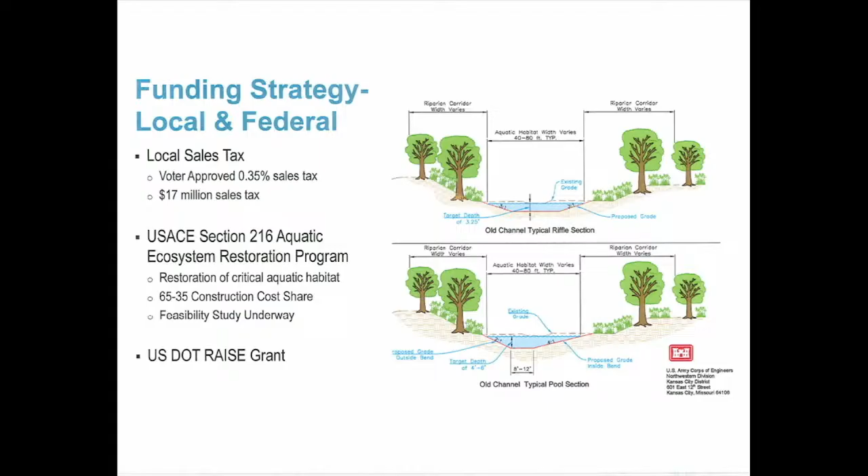And then there's the U.S. Department of Transportation RAISE grant, and Eric Dove is going to cover that part of the project. We received a little over $22 million from the RAISE grant. I joke with people that our 'wow' would have been a 'woo' - it wasn't going to be much of a beautiful area because our funding was going to be so limited. That $22 million really gives us an opportunity to build much, much more of a project.

Now I'm going to talk a little bit about the cost of the project, because some may be interested in that. Our project cost for construction was a little over $28 million. But one thing we had to think about is this project gets built over several years, so we added about $5.5 million of contingency to cover inflation.

In today's world, if somebody asks, is that enough? I don't know, but it was the best we knew at that time, about a year ago when we put this together. We'll know when we go to a bid letting. So roughly this project with the RAISE grant is right at $39 million. The federal share is $22 million, leaving about $17 million for the city.

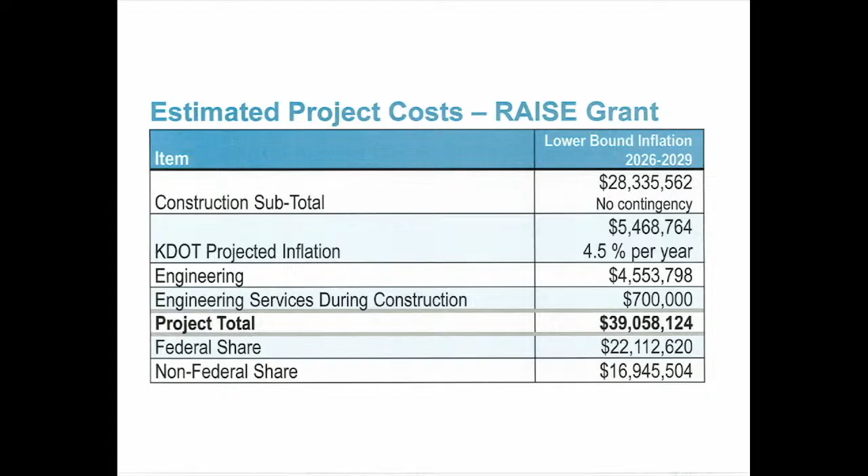To be able to take this project to the city commission on the RAISE grant, when you sign the agreement with them, you're signing up to build everything that was in the RAISE grant, whether it costs more than the money you have. So when you sign up, you're signing up to build the project for whatever the cost is. I was trying to be honest with our leaders and show the RAISE grant and the U.S. Army Corps of Engineers project, which in the future we'll be talking a little bit more about - I think a public meeting on it maybe in August.

But there are some additional costs that go into each of the projects, including the RAISE grant, feasibility study, 4th Street Plaza, and property acquisition and so on. It's roughly about a $46 million project total. The U.S. Army Corps of Engineers project as budgeted today is a little over $21 million.

We have some additional costs with them for a feasibility study, and we're purchasing some water rights from Kanopolis Lake to be able to have water when there's drought conditions and low flow in the river. That's through the assurance district, and recreational rights are approved there. So roughly 22 to 23 million there. So our total project spending on the RAISE grant and the U.S. Army Corps of Engineers is roughly 69 million.

And I was a little short on money when we put that all together and included the inflation, so we had to look for some other funding. We're looking at dollars through the general fund, the utility fund, some ARPA funds from the COVID times, and street and property tax. Ultimately the city's share is $29 million budgeted now, and about $40 million from Friends of the River and the federal government between the Corps and the transportation grant. So I'd like to say we've leveraged our money, and we're about 42 cents on the dollar for the project.

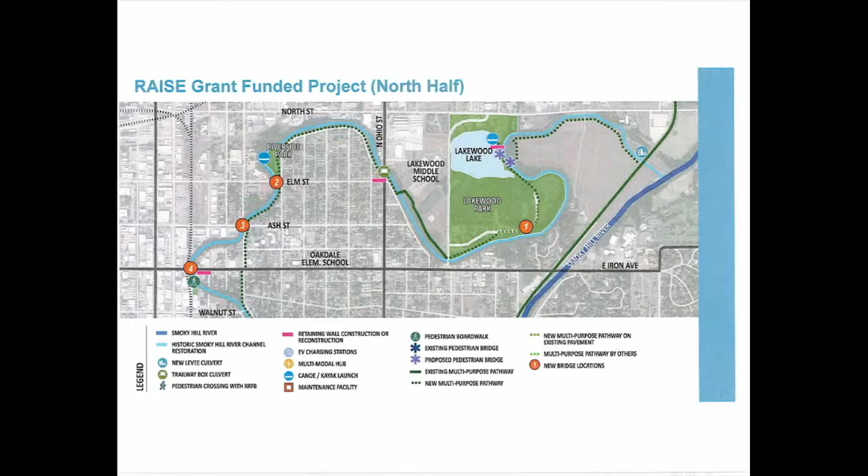We'll be able to close that for special events. Troy will have some wonderful renderings that will show what that looks like.

As we continue to move south, now we're into Oakdale Park. There will be a building for the city to store a boat so they'll have access both for maintenance and emergency events, and there'll be a new kayak launch there too. The building was located in Oakdale because there'll be a flex space, so it can be used during major events like the River Festival. It'll be a dual purpose building.

We'll have additional trails that come down through the park and tie into the YMCA trail that was built. That trail is 10 feet wide, and it'll be very similar to the trails we'll be building. At the YMCA driveway, there will also be a new bridge and a new canoe and kayak launch facility there. Coming on down through to South Ohio.

South Ohio, there's actually a culvert there, but you can't see it. It's completely filled with sediment—about 7 feet that has to be removed to get the water flowing downhill again. So we'll put in a twin box culvert: one box for the water, one box for pedestrians, so you'll be able to go on the trail and go under South Ohio, just like what you can do at North Ohio.

We have a bus stop right there, and right now you have to race across 5 lanes of traffic to get there. So we'll have pedestrian improvements to take you under.

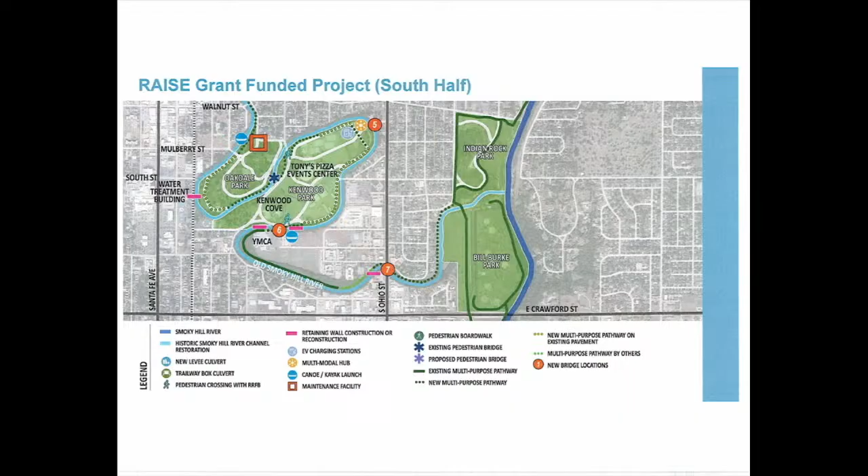There's an existing trail that we'll go ahead and pave, and that'll take you into Bill Burke Park. So when we're all said and done, you'll be able to go from the levee trail that's there all the way through these new interconnected trails, all the way back into Bill Burke Park. I failed to mention Midway—Midway also gets a new bridge. So a lot of elements, and I buzzed through that as a big picture so that Troy has plenty of time to start talking through the aesthetics and what each of these would look like.

I always say Troy gets the fun part, he gets pictures.

Thank you, Eric. I'm going to expand on some of these items Eric was talking about. So basically the process we followed was—Martha mentioned the previous effort where we had 25 members of our aesthetics committee. What we did since then is continue some of their ideas and thought process that they helped us with during our master planning process. We got together a smaller group that focused on some of these aesthetic design elements.

What we did is produce an aesthetic design handbook. So whether things are in this phase or a future phase, you can always refer back to this handbook and say, here's the materials we need to use within this certain area if we're adding an amenity within the corridor. Whether it's in this phase or not, they can always refer back to that and see what was envisioned, at least during this effort.

Some of the items we covered for enhancements on design features were the bridges—looking at the various materials used, different lighting, and how the pedestrian handrails could look. We also looked at the paving and hardscape materials: are we using bricks, colored concrete, textured concrete, things like that.

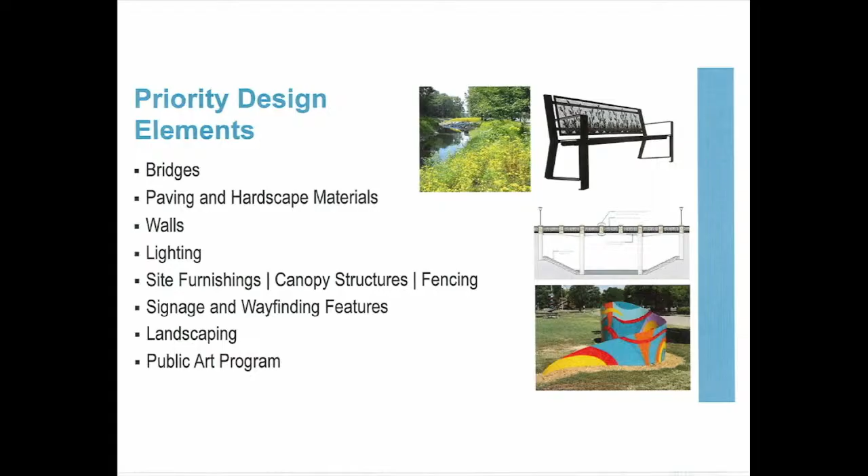We thought it was best to break apart the corridor into districts. Within each of these districts, everything would tie together—like we'd have the same bench there, we'd have the same materials used for the pavement. And we broke it into 3 distinct districts.

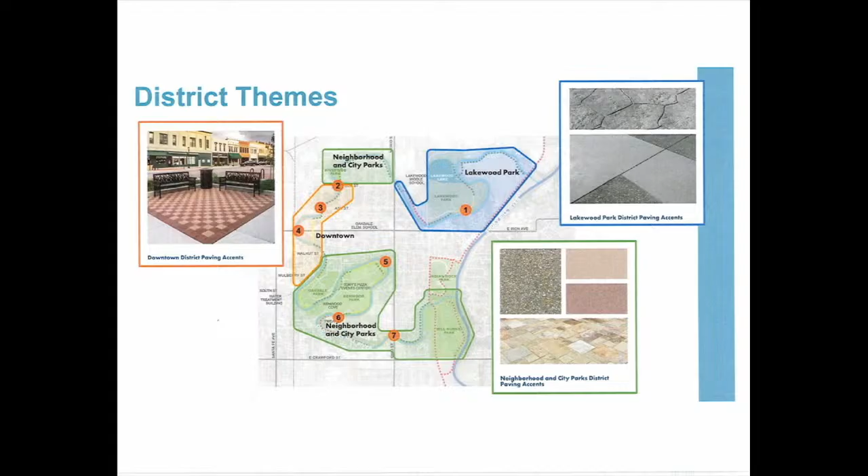So to do that, we looked around town at some of the local precedents and features that already exist. We tried to take cues from those, whether it's the materials, the shapes, the patterns. You can see a lot of the Art Deco patterns on the buildings down there and surrounding downtown.

We took a look at the downtown streetscape as well, and some of those elements utilized with the overhead pedestrian crossings that are mid-block. But then you can see some great features within some of the existing parks—Oakdale Park and Kenwood Park—with some of those old WPA-style stone walls and picnic tables. So we're trying to use some features seen there as well. Here's another set of elements we're looking to incorporate similar ideas from.

So the first thing we're going to talk about tonight is the bridges. This is a picture of the existing Midway Bridge, which is just outside behind me here. As mentioned earlier, there are 7 new bridges in these 7 locations.

Number 1 would be the Lakewood Park Bridge—that's the vehicular bridge, but as Eric mentioned, there are 2 pedestrian bridges there as well, just on the east side of the lake. If you can see those purple asterisks, it might be hard to see from where you're sitting, but there are 2 pedestrian bridges there and one vehicular bridge.

Then moving on to number 2, the Elm Street, the Ash Street at number 3, the Iron Avenue at 4, and then number 5 would be the Midway Bridge, again right outside the doors here, and then the YMCA Bridge, and the South Ohio twin box culverts. So I'm going to show you images of the vision for each one of these.

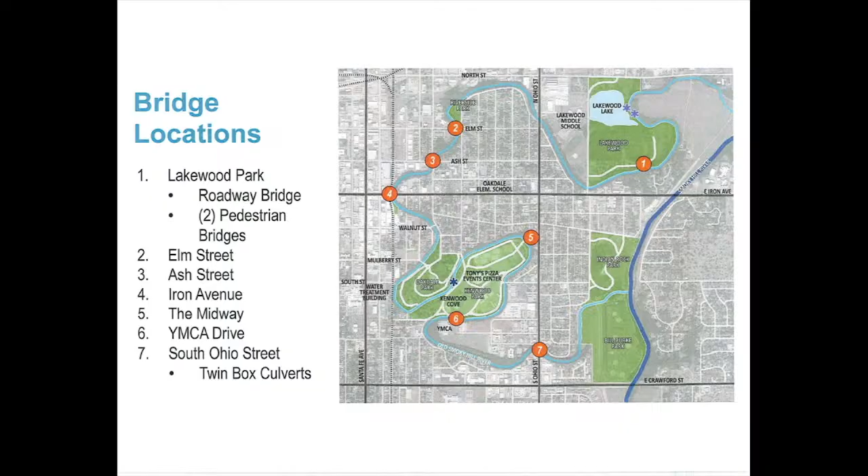Here's the Lakewood Park Bridge, and again, we want to incorporate naturalistic elements. What you see on top are 2 photos—the one on the right would be limestone materials, more natural stone, to be incorporated in the columns that you see on the bridge deck itself. Between those columns would be a pedestrian railing where we'd incorporate features like the one on the top left, which is big blue stem grass, one of the main native grasses in the area.

To tie all the bridges together, we're using the same lighting style, so you can see those images on top of the bridge. That will be utilized on all of the bridges within the project here. So that's the Lakewood Park Bridge.

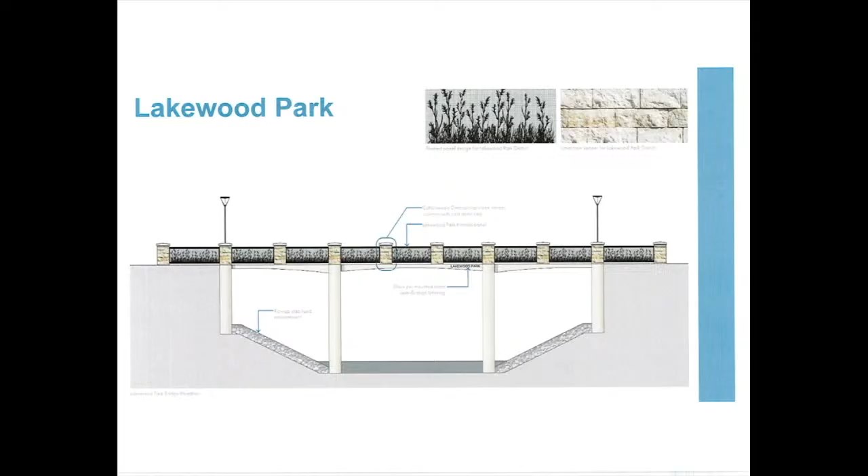Next is the pedestrian bridges, which are also both in Lakewood Park. These are a little different—they're going to be pre-manufactured off-site and then just dropped into place, with the abutments that we'll be building there. As Eric mentioned, one will cross the existing historic channel, and another will cross where the connection is made between that existing channel and Lakewood Lake. They're not too far apart from each other, generally on the east side of Lakewood Lake is where they'll both be located.

But as far as the appearance, they will all be kind of weathered steel, as you see here—that rustic type of color.

That'll have a concrete floor on it, not wood planks like you see in that bottom right photo, but more like the middle photo with a concrete decking on that.

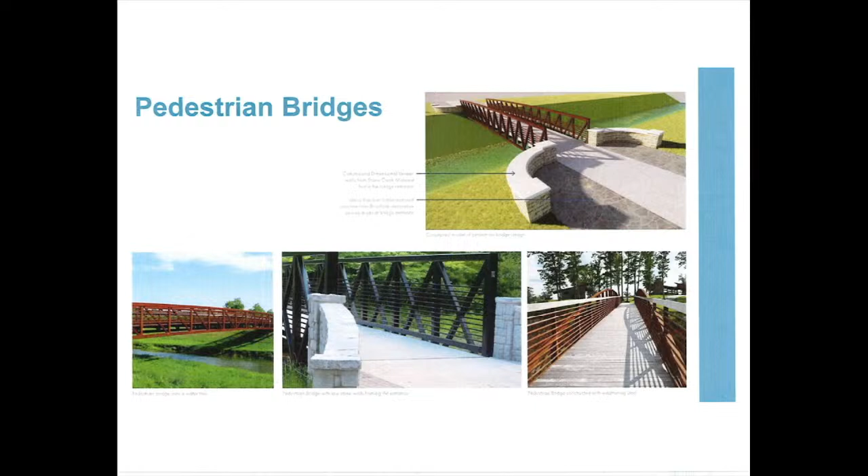The next bridge moves into the downtown district. Elm Street, Ash Street, and Iron Avenue all have features of Art Deco, so we're trying to tie that together with the downtown features. We're utilizing similar brick colors to what you see in the downtown streetscape along Santa Fe Avenue, the two tones of brick colors. Within the columns on the top side of the bridge, we're incorporating that chevron shape you see downtown on sidewalks as well, which helps tie that together.

On Elm Street, the pedestrian railing at the top of the bridge would incorporate that. This bridge would have the circular pattern you see there, an Art Deco pattern. Again, turning it from a culvert currently to opening up quite a bit underneath there to really allow the water to flow through.

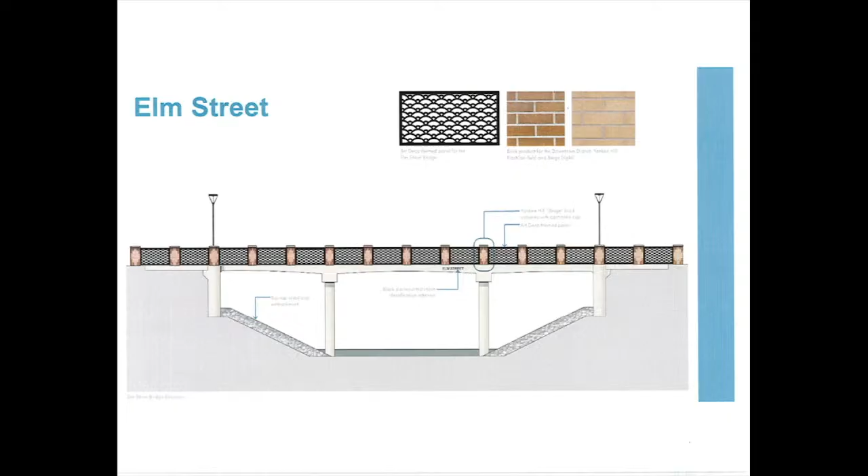Ash Street is pretty similar to the Elm Street one, except it has a different Art Deco pattern for the pedestrian fencing up top. Other than that, they're fairly close - the same lighting, the same brick columns on both those bridges.

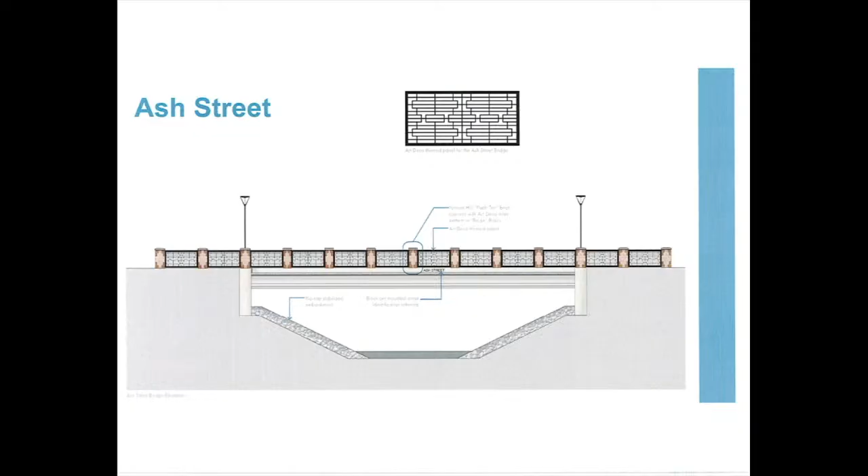The Iron Avenue bridge is what we see as the gem of all the bridges we're putting in. We feel like that's the one closest to the gathering space, the closest point to downtown Santa Fe Avenue, and we have a lot more opportunities to incorporate aesthetic enhancements there.

You notice underneath the bridge on the left side, that'll be a boardwalk connection, so we'll be able to get right down there at the water's edge. The boardwalk will be raised about 1.5 feet above the water surface, and that'll be going in as part of this phase.

On the other side of the bridge, on the right side, that's a future connection for the multi-use trail to go underneath there. Just due to funding, and it would require a lot of retaining walls to get down there at this phase, we had to bypass that particular location for the trail, but the plan is in future phases to make that connection.

On the sloping walls that go up to the top, we'd again use those same two brick colors in a random pattern to help tie that together. The columns themselves are going to be concrete on this one, similar to the existing bridge now where all the concrete columns are currently, but between those concrete columns, the shape will be similar to the downtown street monuments.

Where it has the street names on them along Santa Fe Avenue - similar shape to that, as well as the columns that hold those overhead pedestrian crossing panels. The same lighting would go here that you see elsewhere, and the pattern on the pedestrian railing would be similar to what you see downtown on Santa Fe Avenue on those pedestrian crossings. This one will have a lot more enhancements for lighting as well.

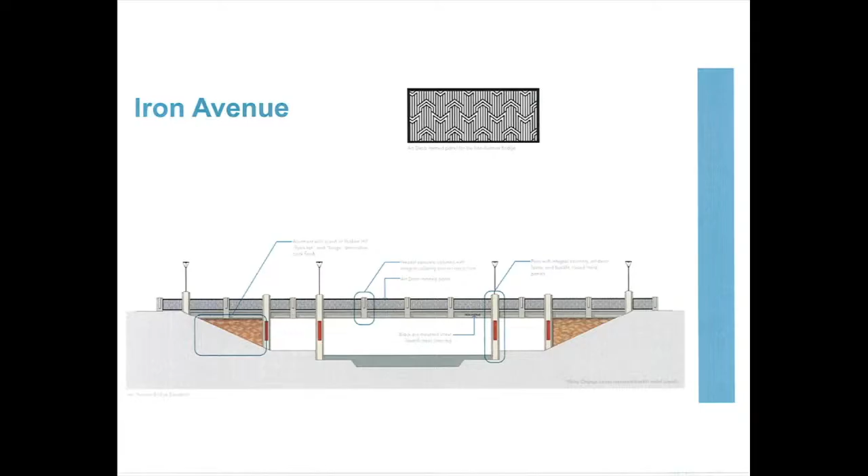Now we're moving into the Parks and Neighborhood District, and this is the Midway Bridge right out front here. Again, you can see on the bottom, this won't be part of this phase, but we're leaving space for a future trail connection to go underneath Midway during a future phase. Right now there's going to be a trail that'll cross at grade up on the top level, but there are plans for a future phase that would go underneath here.

As for materials used here, instead of brick or the limestone pattern we saw on the other bridges, these columns would have more of that WPA style stone work like we see in Oakdale and Kenwood Park. Similar stone look, and that would also be on the slope that goes from the river up to the top of the bridge too - similar elements as far as the stone work there.

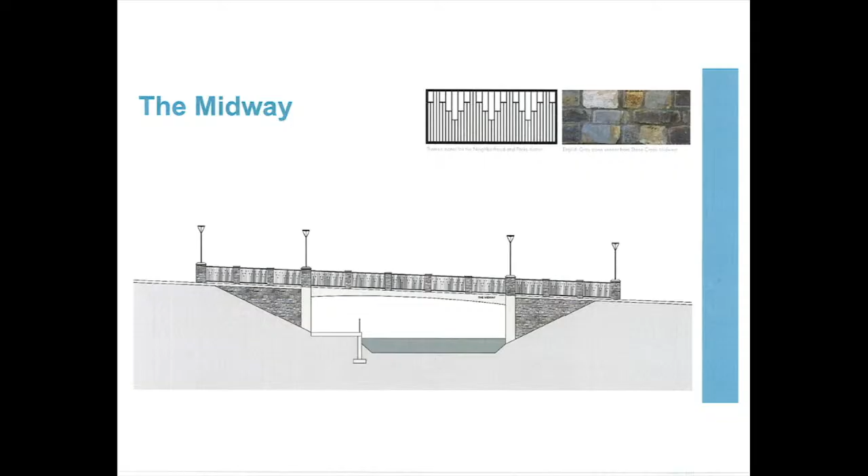The YMCA bridge is just one of the shorter bridges in the corridor, but it's a very important connection for the kids that go between the YMCA and Kenwood Cove. There will be a lighted walkway crosswalk for them to get over to Kenwood Cove, so it's a safer connection. But it would have similar columns to what we saw on the previous Midway Bridge.

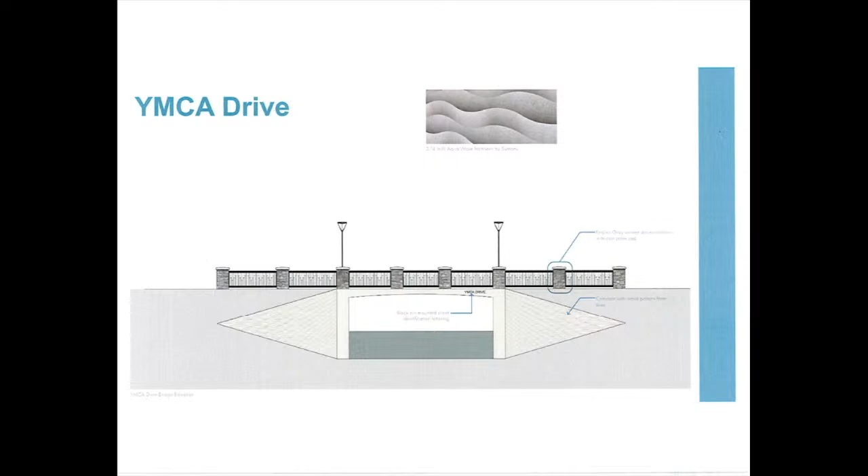On those triangular wing walls that come out, we anticipate using a pattern like you see on top there, kind of ripples that invoke movement of water. That's a foam liner on the concrete wing wall that'll have some texture to it, and we can use lighting on that to create different shadows and a nice aesthetic appearance.

The last one is technically a bridge because the opening's wide enough, but it's really two side-by-side box culverts, as Eric mentioned. This is what an image of that could look like - side-by-side, 12-foot wide openings, with the trail on the left and the water box on the right. You'll see a big retaining wall on the right as well, leading up to the Kawasaki dealership that's there currently, and then that would have a nice fence and railing on top so folks don't fall over the edge. But that's the idea there.

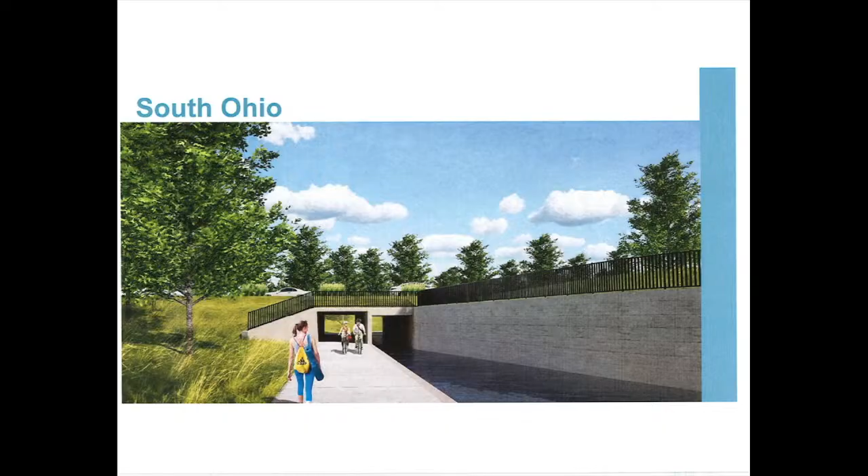Along the side of the trail, you can see some of the landscaping there. That's the idea - we don't want a manicured slope. It'll all be native materials that don't require weekly mowing or a lot of maintenance once it's established. So that's kind of the idea throughout here.

4th Street Plaza is right at 4th and Iron, one of the closest points to downtown and Santa Fe Avenue. You can see some of the existing photos on the right - that's where the car museum is, that old gas station on the corner. The white building in the top right is right at the corner, next to the old flower nook. It also has a railroad going right through the middle of it, which causes its own set of challenges. But we see this as being a nice gathering space for the community, right there at the Iron Avenue Bridge.

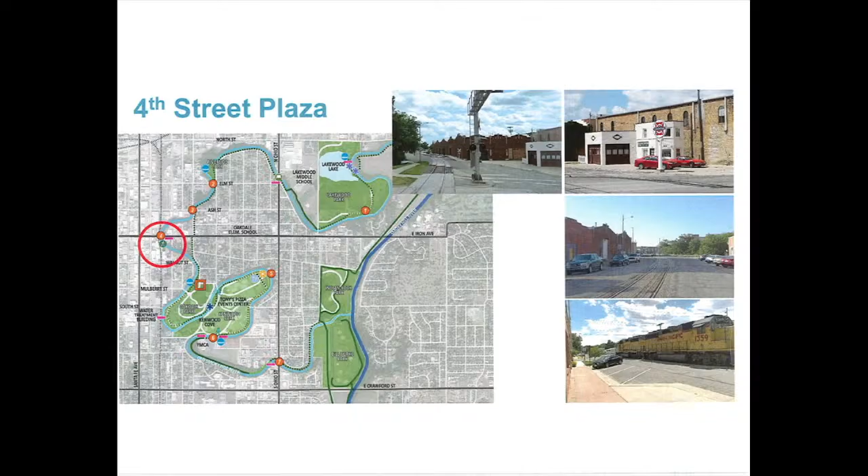Here's the vision for what Eric was calling the complete street - I call it a shared space street. We're envisioning a curbless environment, so there are no physical curbs to help direct cars. We're using other features to make that transition between what's used by motorists versus pedestrians or bicyclists - things like bollards, vegetation, light poles, benches, and large limestone blocks, to help prevent folks from driving off-line. Although it's as wide as a typical roadway, we're visually narrowing that by using bands of concrete on either side.

It might be hard to see from there, but as well as the middle, we basically turn a 24-foot roadway into two 9-foot lanes. That visual narrowing of the roadway causes the motorists to slow down as well.

The crosswalk you see in the bottom right there with the number 6 is aligned with the 4th Street entrance into the car museum. That's kind of the southern terminus of what we're talking about here, the car museum steps that go down from their entrance off of 4th Street.

What you see grayed out in the top there is that future project. That project, along with the steps I showed you a couple of slides ago that go down to the boardwalk, is all a separate project. What's anticipated to go in there is a playground, a pavilion space, a water feature type of project, as well as some other seating areas. All that will be a separate project, but it's adjacent to this plaza area.

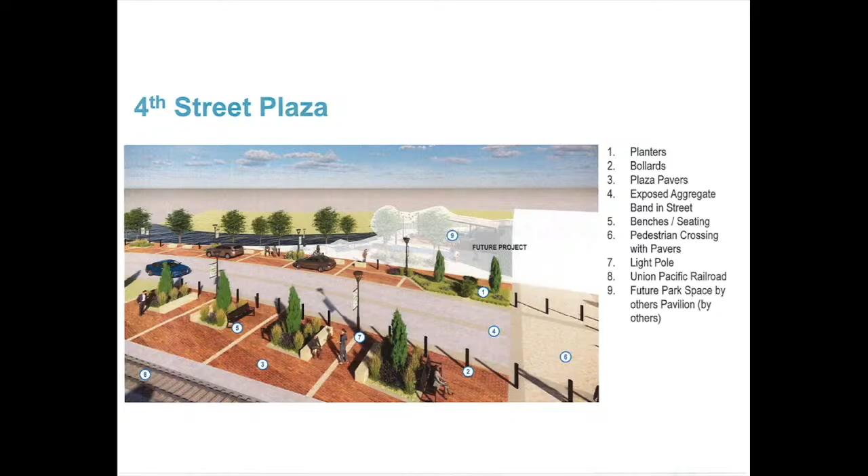This takes a look at it from the north. This is Iron Avenue looking to the south. You can see the old gas station there with the white building on the right, kind of blocked out. But in the middle of the roadway you see those 3 vertical bollards - those can be removed or put in place when there's an event to have that street closed off.

It's hard to see the boardwalk there. You can kind of see it up to the water. This is why I showed that first slide that showed that a little better. So that boardwalk is included and the street is included, but that transition from the street down to the boardwalk is not included here. We do have a set of stairs over at 3rd Street that'll access that boardwalk until this interim project goes into place.

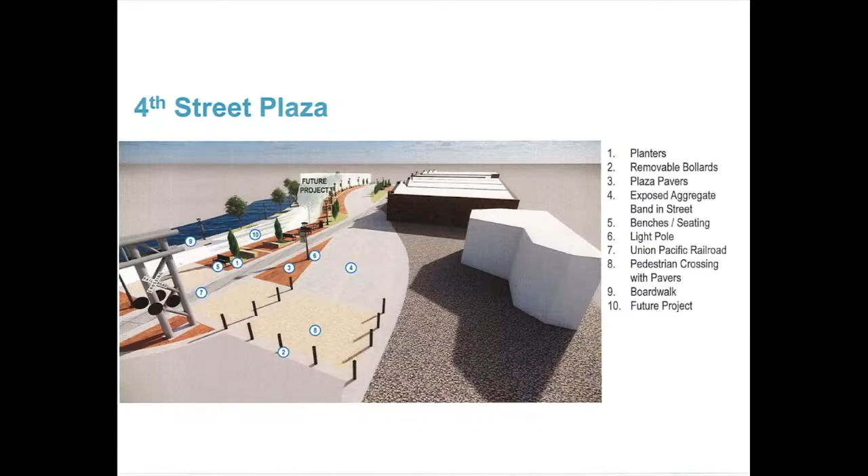But there's 4 locations that we're showing canoe and kayak launches to be located. The first one is Lakewood Lake, that big circle on the top right. Left of that would be the Riverside Park connection. South of that would be at Oakdale Park. Oakdale Park is where the maintenance facility is, where they would store the boats and some of the other items needed for maintenance along the river.

That will have a boat ramp as part of that, but that boat ramp will not be open to the public - it's just for the maintenance boats, so it'll be blocked off when they're not using it. But adjacent to that boat ramp will be another one of these canoe kayak launches. So although you can't drive a trailer there and get a boat there, you can bring your canoe or kayak and bring it down adjacent to that boat ramp.

And then the YMCA is the last location. This is located just on the east side of their existing parking lot. So that's kind of the location we're looking at for those.

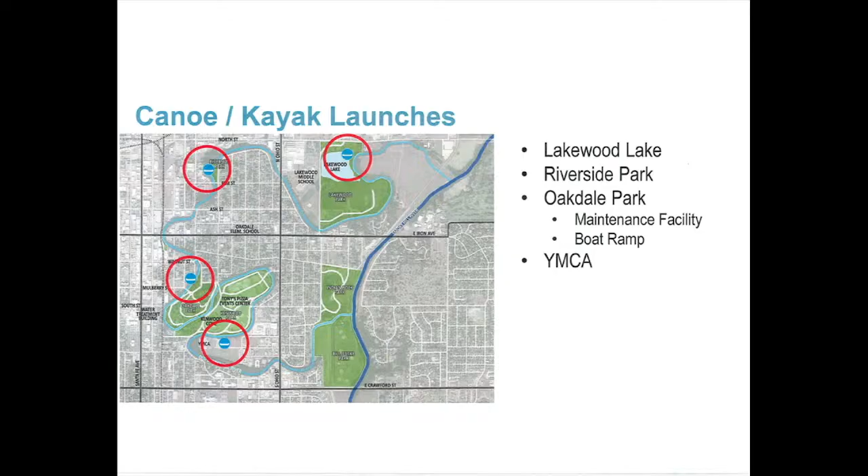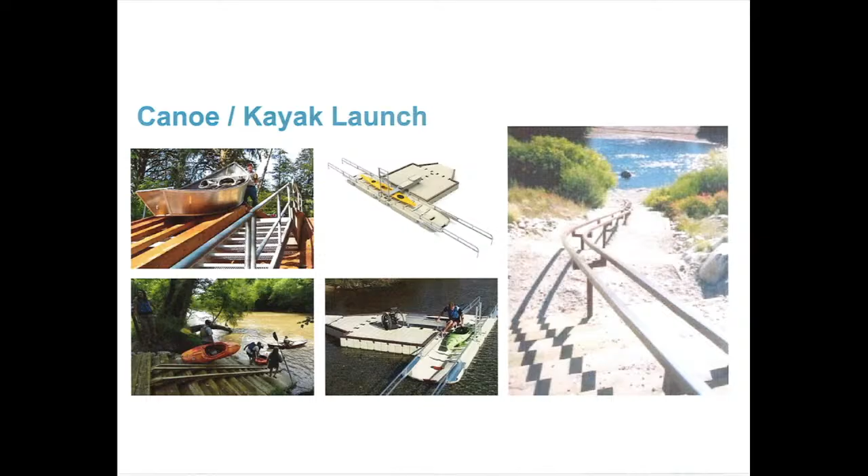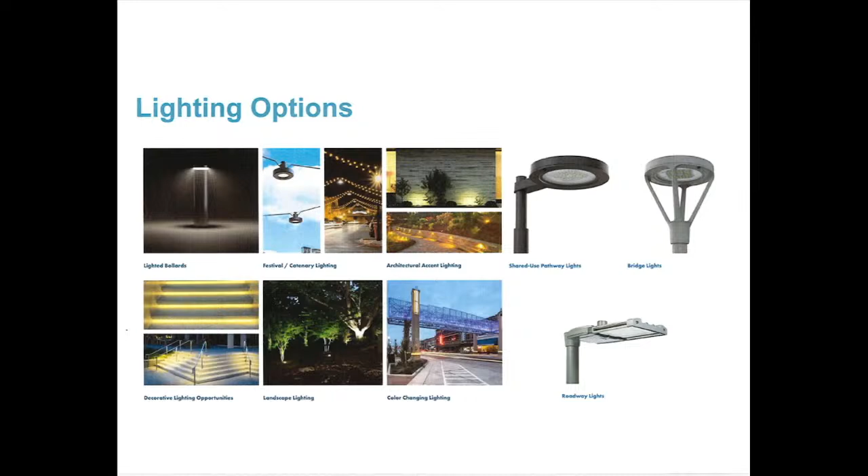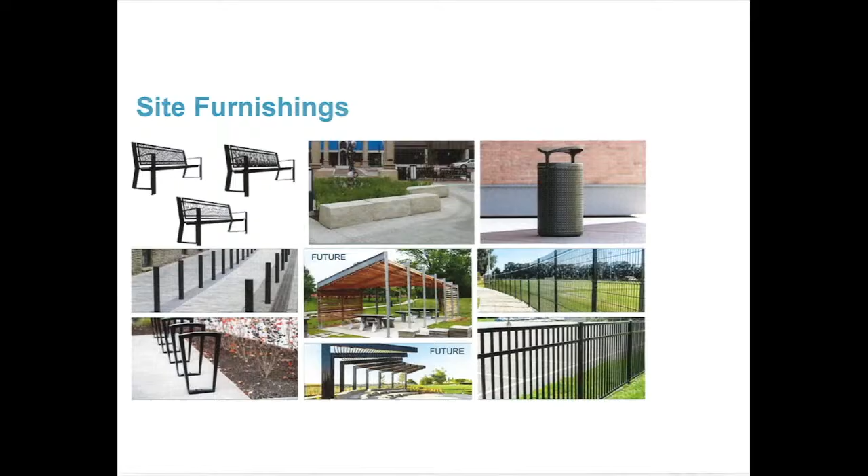Also spaces for the rideshare vehicles to wait at, and the bicycle trail goes right through there. So it's a good trailhead location where you can park your car, take your bike off, and get on the trail system right there, going either direction.

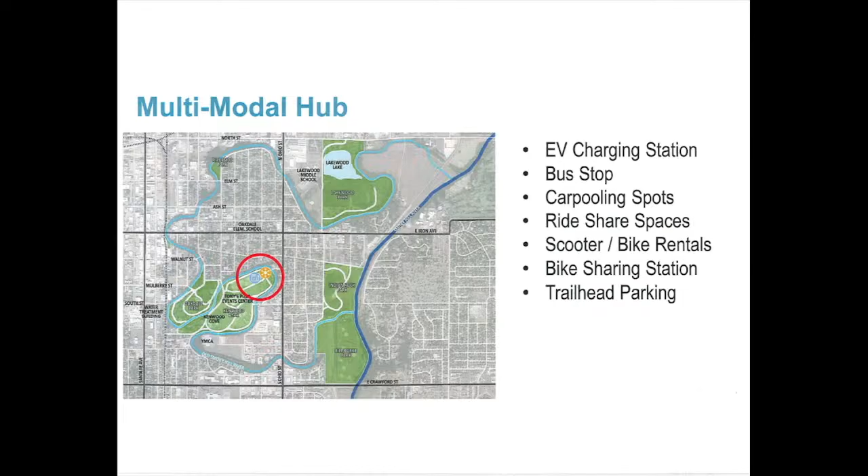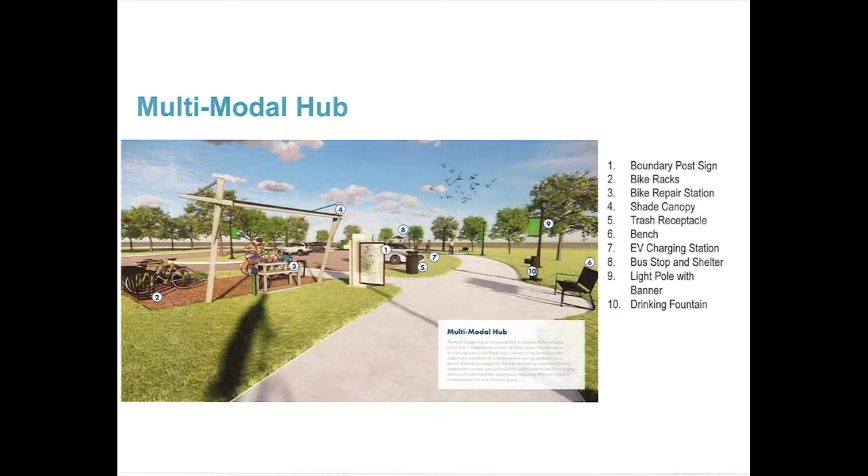Within that number is also the existing YMCA trail, and it includes the existing trail by the middle school as well. So not all of that 6.3 miles is part of this project because they're already in place.

The other thing I want to mention is there's some different configurations throughout. I mentioned the 10-foot concrete trail is the preferred option, but we can't fit that everywhere. In some locations between Elm Street and Walnut Street, and then it'll go on Front Street, that'll be an 8-foot wide trail.

It's because we're working within the existing right-of-ways there, and just trying to fit a 10-foot trail in a limited space was a little challenging. So we narrowed it to the minimum allowed under the federal guidelines we're using, which is 8 feet.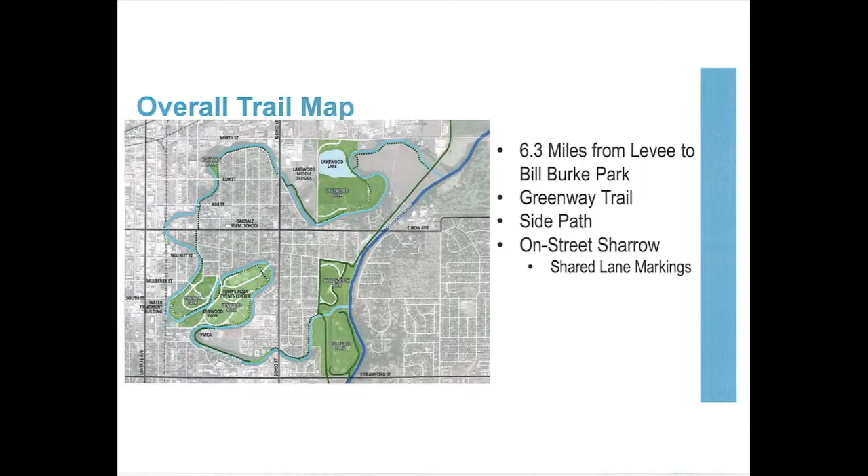So just zooming in a little bit here. The top right you can see the solid green line - that's the existing levee trail there. What we're talking about putting in new would be those dotted green lines that come off the trail. You can see the crossing where we cross the existing channel of the Smoky Hill - that'll be the one location of the pedestrian bridge.

And then just to the north of that, not shown here, that's where the connection to Lakewood Lake and the Smoky Hill River is going to happen. So that'll be another pedestrian bridge there.

As we go to the south and get away from the lake a little bit, there's a small parking lot there, and that's kind of where we will go from an off-street condition to the sharrow, where we're going to use the existing pavement. That's where you can see these better. We'll have some boards out later you guys can come take a look at, but that'll be the shared space, or the shared lane.

Then it connects across over to Lakewood Middle School, that's the solid green line there, crossing the existing pedestrian bridge to the west side of the channel. That's where we start to dive down as we're nearing Ohio, to go underneath Ohio with the box culvert.

That's there to improve that crossing for the middle school students, following along the north side of Riverside Drive. The green chunk on the left is Riverside Park, so we go through there, and that's where the canoe kayak launch will be.

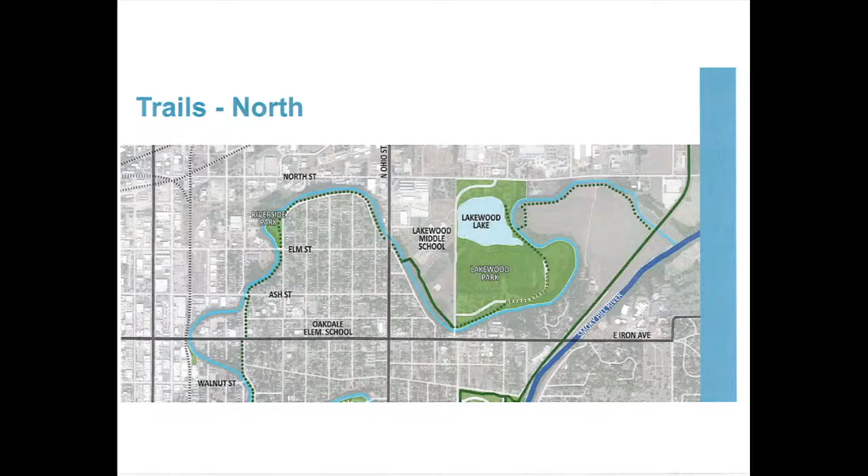Once we get south of Iron Avenue is where it shifts to the west side of the road, all the way down to Walnut, which is in the bottom left on this page. It follows the side of the road there until we get to Mulberry.

Once we cross that bridge at Mulberry, we're using one of the park roads with low traffic volumes, so it's fairly safe. It goes around back behind where the band shell is, where there's a little cul-de-sac. From the cul-de-sac it goes off-road again with that 10-foot wide configuration.

We're crossing from Oakdale Park over to Kenwood Park on an existing pedestrian bridge. Once we get over to the Kenwood Park side, right in front of Tony's, that'll tie into the multimodal hub I talked about earlier, using a lot of those existing Kenwood Park loop roads, on the street itself, existing pavement, until we get close to YMCA Drive.

That's where the Master Gardeners are currently located. Those folks are going to be relocated closer to where the Midway Bridge is going in. So we'll go through that current Master Gardeners area, crossing the YMCA there with the new bridge, and then that ties into the newly constructed YMCA trail where you see the solid green line.

There is a gap between the end of that YMCA trail and Ohio Street. That's going to be a separate project that the city and Friends of the River are working on funding as well, but we will take it up. Those are the lighter green lines, if you can see that well.

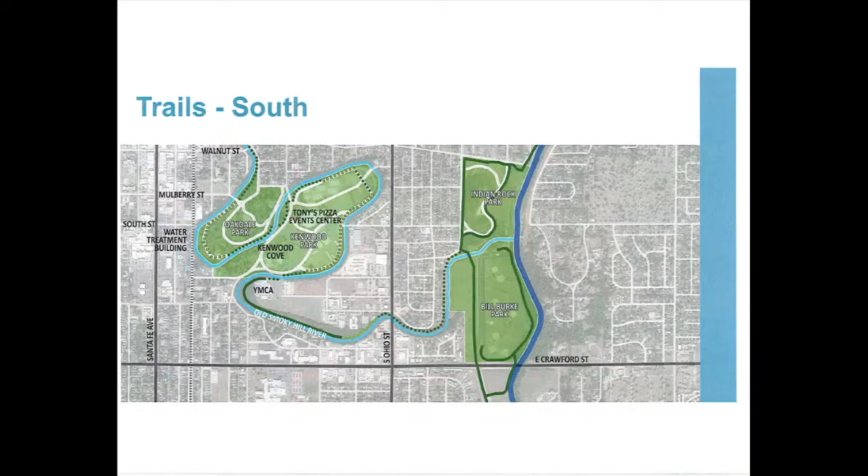So that's all I got for the fun stuff.

Now you guys talk about some of the property real estate issues.

Martha did a great job talking through the financial aspects of the project, then we go to Eric, and Eric talks about engineering, and Troy talks to us about the aesthetics. I'm here to talk about the people side of the business, and that's ultimately real property acquisition.

Under the United States Constitution, the Fifth Amendment basically guarantees that if a government needs to acquire land, it has to happen with just compensation. So to do that, in 1970 Congress passed what I'll call the Uniform Act - there's a long title, and if you want to come see me later I can tell you what it is, but it's just called the Uniform Act, that's what everybody refers to it as in the business. Basically what it does is outline the process by which a government entity has to acquire real estate. It's managed at the federal level by the Federal Highway Administration, flows down to KDOT, which ultimately flows down to the city of Salina.

So for this, in order to build any kind of infrastructure project, sometimes you have to acquire real estate. Thankfully on this project, the vast majority of the path is city-owned property and undevelopable ground. But you can see with the purple and the green, there are some locations where real estate rights do need to be acquired. I'm the real estate team lead for this, I'll be leading that effort.

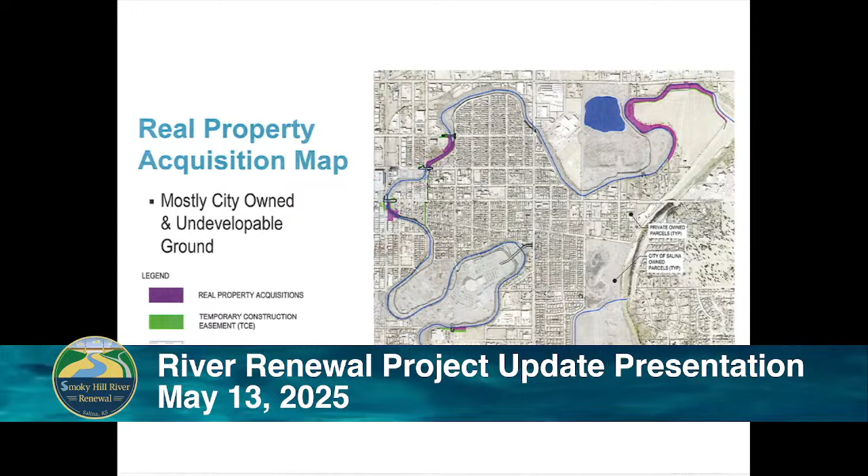So here's the process. They did all their work and created a set of right-of-way plans, which identifies what those real estate rights need to be in order to do this project. So the first step, once we have those plans in place, we obtain title information for each affected landowner and each affected parcel, and we provide notices to those landowners.

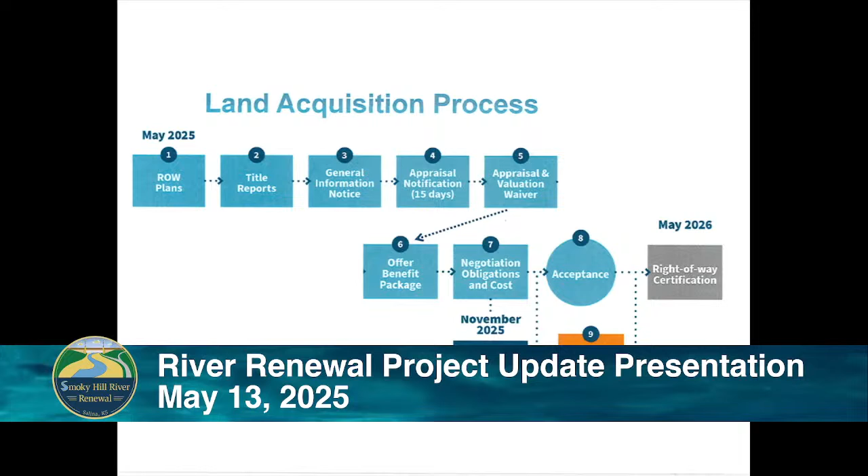Then it goes through a valuation process. There's an appraisal notification that occurs, and appraisals happen. There's a provision in the Uniform Act that allows, if the value of the land to be acquired is less than $15,000, they can go through what's called a waiver valuation, which helps save the city and the taxpayers money. There's methodology there, so we get appraisal reviews on the ones over $15,000, and we do waiver valuations on anything under $15,000.

From that, an offer package is created. Then our negotiators go and meet with those affected landowners, walk them through the easement or acquisition documents needed, walk them through the project, and walk them through the valuation and how everything happened, and we go through a negotiation process. There's also an opportunity for landowners to donate the real estate rights to the city, if that's of interest to you. Our goal anytime we negotiate is to negotiate in good faith with landowners and come to a reasonable conclusion. Sometimes that doesn't happen, and we go through a mediation process after that.

We're hoping to be substantially complete with a lot of our right-of-way or real estate acquisition efforts by November of 2025, but we have to be done by April of 2026, because in May of 2026 we want to have this project certified so the city can move forward and get the project let. So that's ultimately the process that happens.